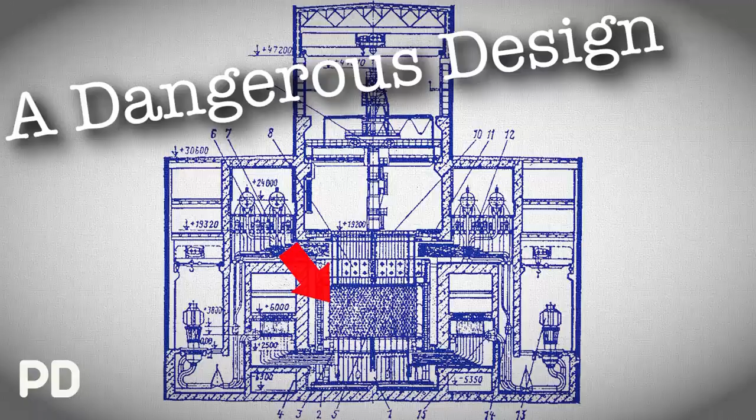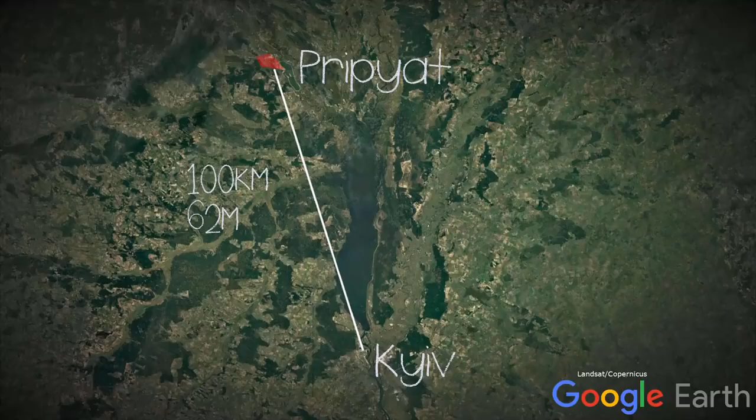Our story starts back in 1970 in Ukraine, about 100 kilometres, 62 miles, from Kyiv, when ground was broken for a new city that would become known as Pripyat, an atomgrad designed to house the workers for a new nuclear plant. The original plans were to build the city and the plant just 25 kilometres, 16 miles, from Kyiv, but it was thought to be too close to a major city, which turned out to be a good decision.

The concept of an atomgrad is similar to, say, Tomsk, which were closed cities, although Pripyat was open later on in its short lifetime as a city. These municipalities were designed to be self-contained communities with a sole purpose: keeping the power plant working and, by extension, keeping the workers employed there happy.

The community at Pripyat was developed to be the perfect home for a young family, with its amusement park and modern, at the time, architecture. In the same year, the ground where the new plant would exist was prepared for construction.

The Chernobyl Nuclear Power Plant began construction proper in 1972 after the central government decided on what type of reactors the site would house. Originally, the idea for a pressurised water reactor was thought to suit the new plant, but it was overruled.

It was overruled by Anatoly Alexandrov, the chief scientist who was at the time supervisor of the project of RBMK reactor plants. The reactor type was preferred due to the design being cheaper to produce, and as we found out with Leningrad, cost was a pretty high priority, some might say even over safety.

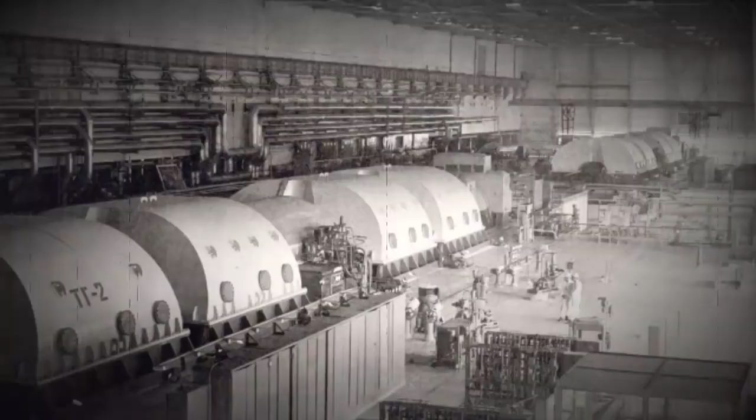The nuclear power plant had the first of its 4 reactors ready to operate in 1977, followed by number 2 in 1978. As a quick side note, Units 1 and 2 were the first generation RBMK-1000 reactors, and because of this they had slightly different core loadings and containment structures.

But the remaining 2 reactors at Chernobyl were of a slightly more modern second generation, named Units 3 and 4, which went online in 1981 and 1983 respectively. There were plans for another 2 units, but these were abandoned after 1988 when risks of contamination left the project untenable.

The nameplate capacity of Chernobyl Nuclear Power Plant was: Unit 1 at 1000 megawatts of electricity, Unit 2 at 1000 megawatts of electricity, Unit 3 also at 1000 megawatts, and the same with Unit 4.

In this video, I'll be focusing on the second generation RBMK, its design, and more specifically Unit 4. But I did look into the first generation in the Leningrad video.

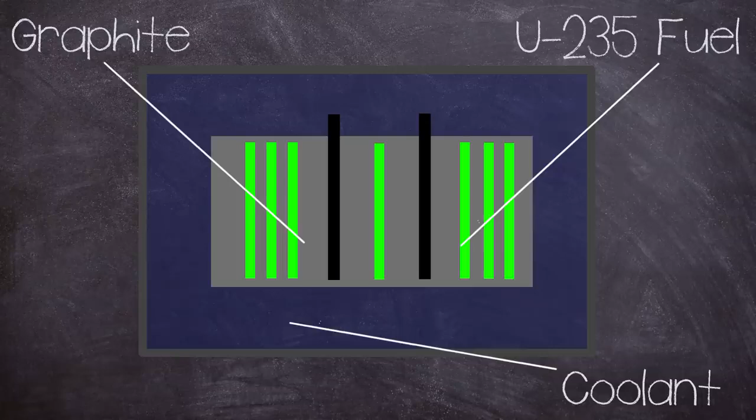The RBMK was a bit of a unique design in the reactor world, but it was a product of evolution rather than revolution, in that it used graphite to moderate the chain reaction with light water as a coolant. This combination allowed it to use lower enrichment uranium-235 for fuel, which is significantly cheaper than other reactor designs. The RBMK had a very large core region consisting of a height of 7 metres and a diameter of 11.8 metres, mounted in a steel cylinder placed on top of a biological shield.

The steel cylinder was 16mm thick and had a diameter of 14.52 metres by a height of 9.75 metres, dug into the floor of the reactor building, inside a reinforced concrete lined pit.

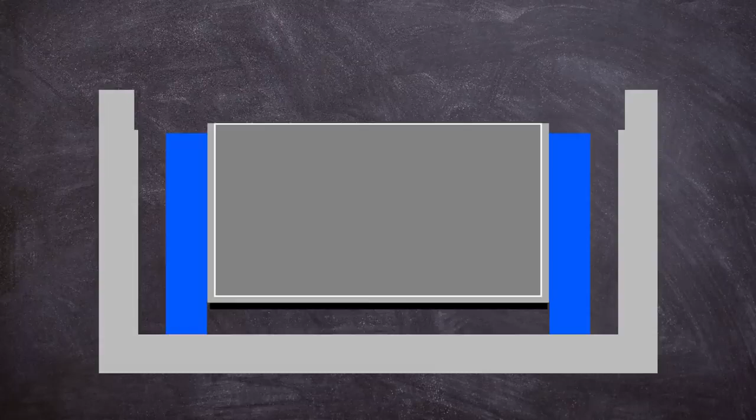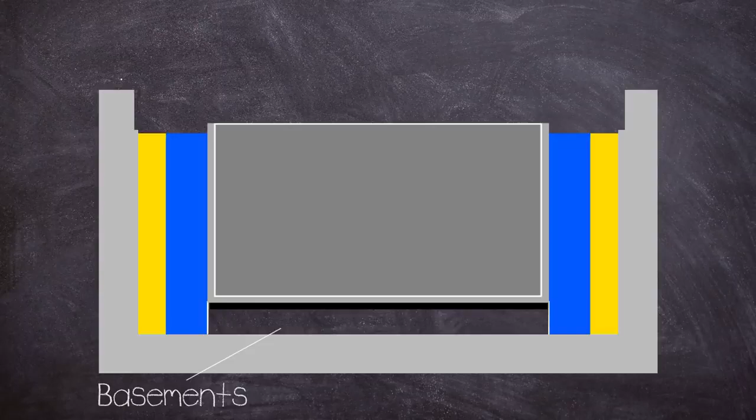Between the steel wall and the concrete lining, a water tank was placed, followed by a sand packing. Below the bottom biological shield, there were several basements used for pipework for the reactor core cooling loops. The core consisted of graphite blocks sized 25 by 25 centimeters, stacked up with holes drilled through the center for fuel and control channels.

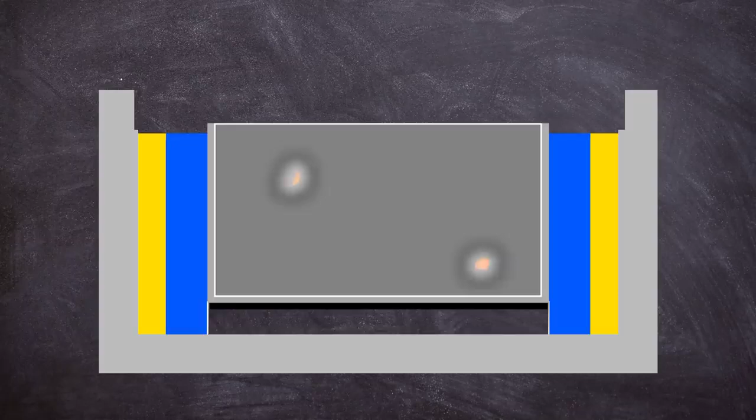The size of the core could cause issues in reactivity control during operation, but we will talk about that a bit later on. On top of the core, another biological shield was placed with a steel cover on top of it, which formed the floor of the reactor hall.

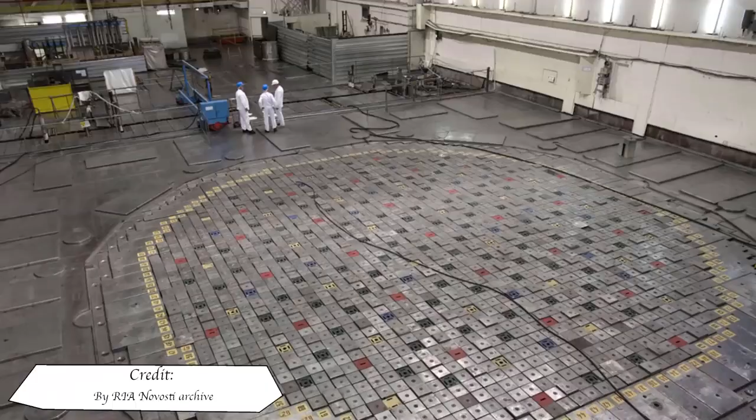The cover plate was capable of withstanding a pressure build-up resulting from steam released by two simultaneous channel ruptures. All of this allowed the design to be refueled whilst in operation, which again helped with costs by reducing downtime.

As a side effect of this, the confinement structure of RBMK reactors is less than ideal, as the tall refueling machine had to be housed inside the reactor hall. Because of the large floor space and subsequent roof requirements, the vast quantities of heavy concrete wouldn't have been architecturally, or more importantly, financially viable.

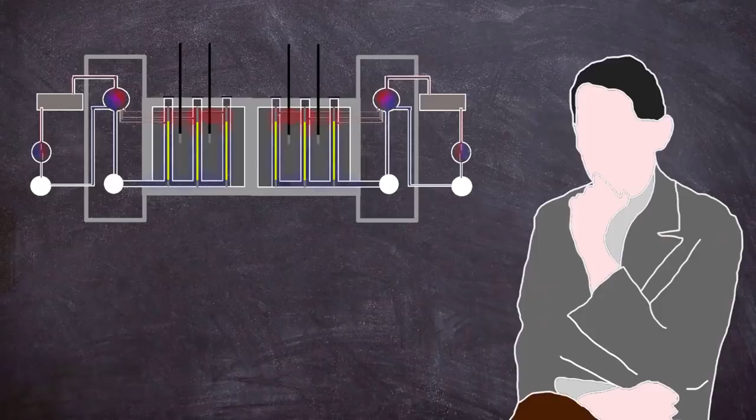The RBMK didn't have a prototype and was instead put straight into production, with the first reactor being installed in Leningrad in 1970. The original designs omitted confinement, instead claiming that the fuel being in its own channel with flowing cooling water was an acceptable alternative.

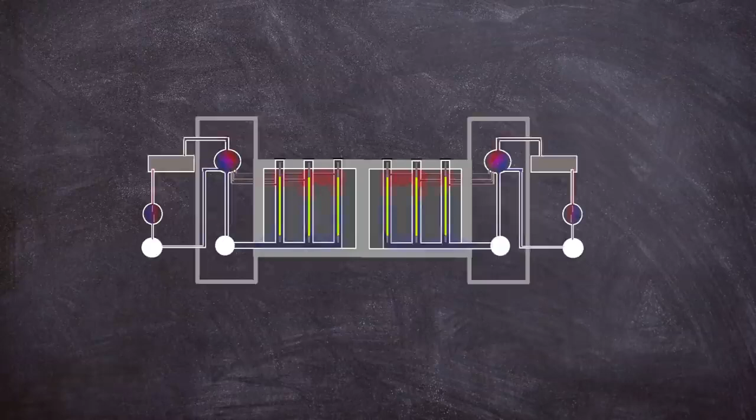The main takeaway from this is confinement was poor, resulting in disastrous results in the case of a fission product release. The coolant was pumped through the core, from the bottom common header through high pressure tube that jacketed the fuel elements, where the water would boil.

Coolant water also circulated in the control rod channels. The primary cooling of the reactor was via two separate cooling circuits, one of each for half of the core, meaning everything was doubled up, leading to four main circulating pumps, which were three operating and one standby per loop.

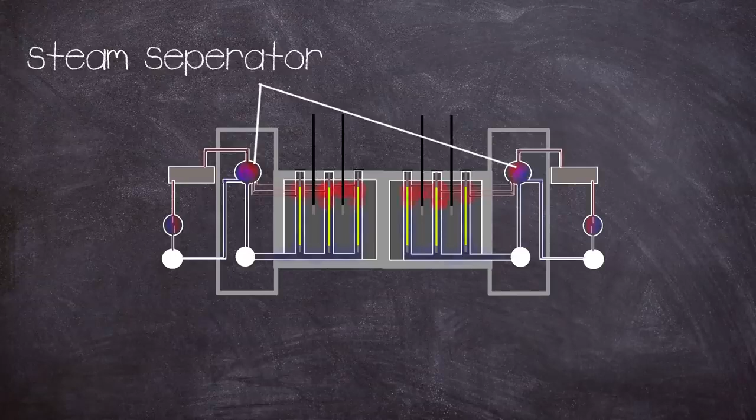As the coolant boils, it exits the top of the core and is passed through a water steam separator, which takes the steam to a high then low pressure turbines which generate the electricity. The steam is then passed through a condenser that turns it back into water to be pumped back into the core, completing the primary cooling circuit.

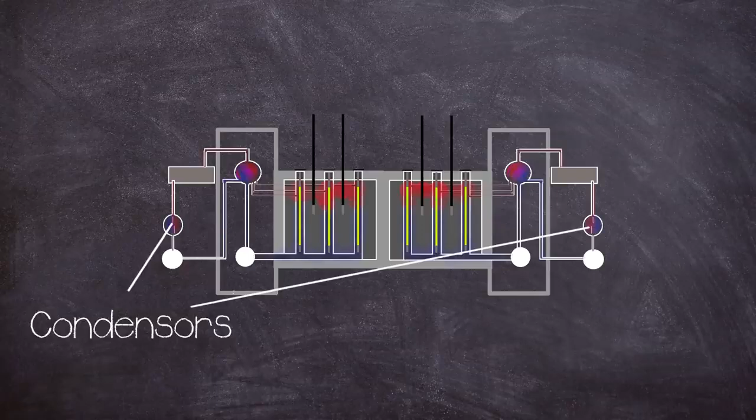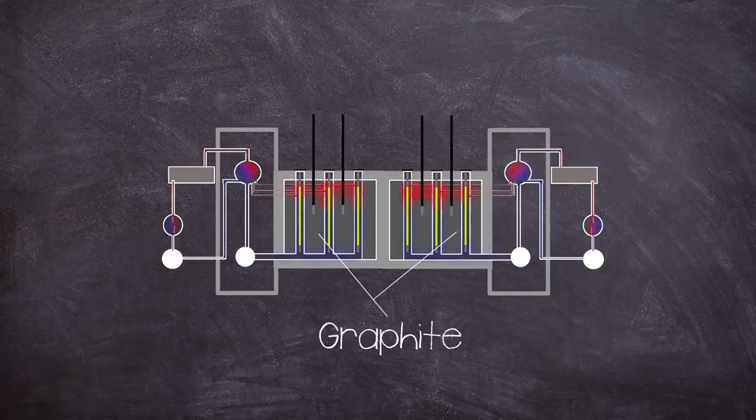The condenser is cooled by using a separate secondary water cooling circuit, meaning the primary cooling circuit is self-contained. As mentioned before, the reactor employed graphite blocks for its moderator.

Now, a moderator is used to reduce the speed of fast neutrons released from fission, so they can better facilitate a chain reaction, getting more use out of the fuel. Ideally, moderators work without capturing any neutrons, leaving them as thermal neutrons.

But where the design has its potential flaw is having a separate coolant that can also absorb neutrons, which can make the reactor unstable in certain situations. This brings up the big elephant in the room, and that is void coefficient.

You see, it wasn't just the graphite that had moderation characteristics, but the coolant water as well, because H2O naturally slows down and absorbs neutrons.

This brings a problem for the reactor, as with the increase in temperature from fission, the coolant boils off into steam, known as voids, i.e. a bubble that does not absorb neutrons. With the steam not absorbing neutrons, this leads to an increase in the power of the reactor.

The RBMK did not rely solely on its coolant for moderation, because that's what the graphite was for, but the water did absorb neutrons, meaning that as it boiled off, the operators had to compensate for this with the control system.

If not properly managed, an incident of a runaway can happen as the coolant heats up, increasing reactivity, heating up the coolant more, creating more steam, leading to greater reactivity, and this is called a feedback loop. During this reactor state, more and more neutrons are produced and their density grows exponentially fast, creating a positive void coefficient. The risks of a feedback loop were greater at certain power levels, but this will be covered later on.

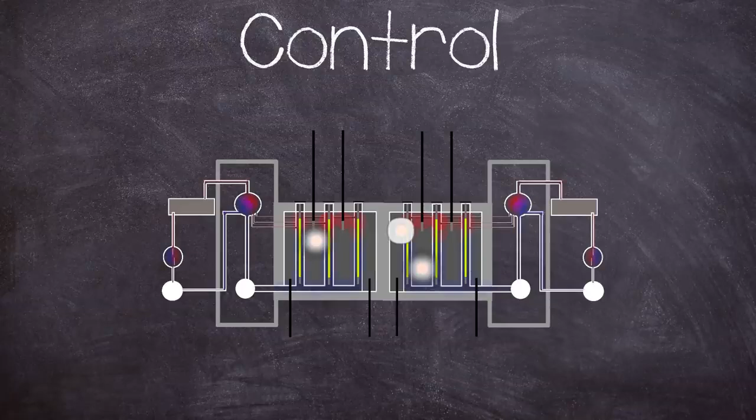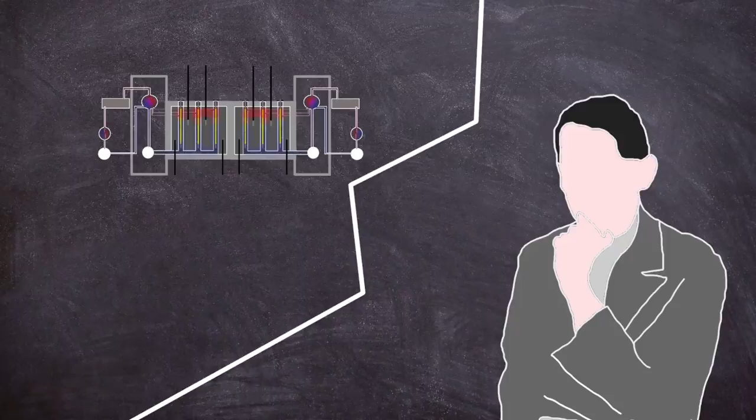And this leads on to the strange design choice for both top-loaded and bottom-loaded control rods. There were 167 top-loaded rods and 32 shortened rods loaded via the bottom, and another 12 automatic controls inserted from the top. The shortened rods were used to manage axial power distribution, which was necessary due to the core size to manage hotspots.

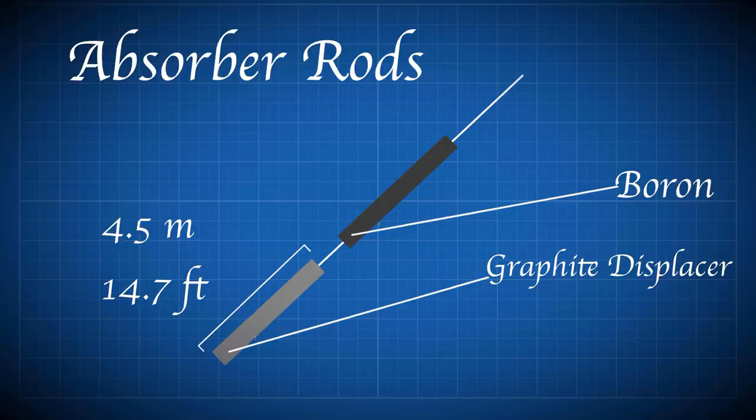The main control rods had a 4.5 metre long graphite rod termed a displacer attached to the end of the length of the control rods, except for the 12 rods that were used in automatic control.

The displacer connected to its rod via a telescope, with a water-filled space of 1.25 metres separating the displacer and absorbing rod. This was to stop water filling the space left behind by the control rod after it left the core region, which would parasitically absorb neutrons. Because removing one neutron absorber, a boron control rod, to be replaced by another neutron absorber, albeit weaker, in the form of H2O, kind of defeats the point of a control rod.

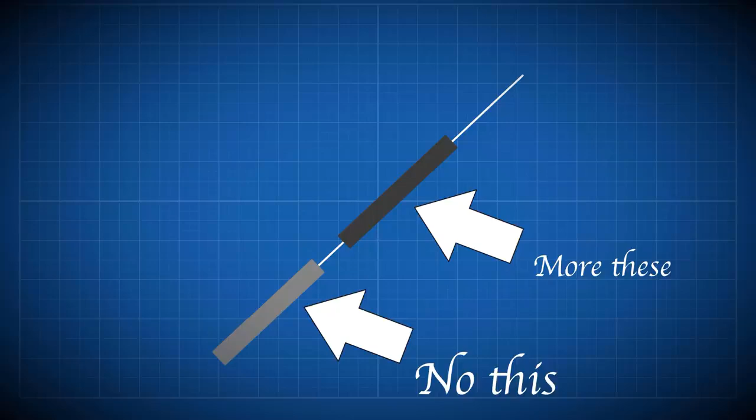Thus, if there was no displacer, then more control rods would be needed, as each one would have less of an effect on the reactivity of the core. The dimensions of the rod and displacer were such that, when the control rod was fully extracted, the displacer sat centrally within the fueled region of the core, with 1.25 metres of water at either end.

But this setup, in certain situations, could cause a positive scram effect. On receipt of a scram signal causing a fully withdrawn rod to fall, water was displaced from the lower part of the channel as the rod moved downwards. This caused a localised insertion of positive reactivity in the lower part of the core.

This was because the RBMK had a high moderator to fuel ratio, meaning the lower part of the core would experience a spike in reactivity as the graphite displacer entered it, replacing the neutron-absorbing water with neutron-moderating graphite. But this situation was only dangerous at certain power levels of the reactor, which was meant to be mitigated by the knowledge and training of the operators, and also importantly by their management.

Part of this mitigation was by having an operating reactivity margin. The ORM is the number of equivalent control rods of nominal worth remaining in the core. The total time required for a scram, or insertion of the emergency control rods into the core when starting from the upper limit stop switches, was around 18 seconds, which was relatively slow, but this was due to the size of the control rod channels and the fact that the coolant had to be pushed out of the way.

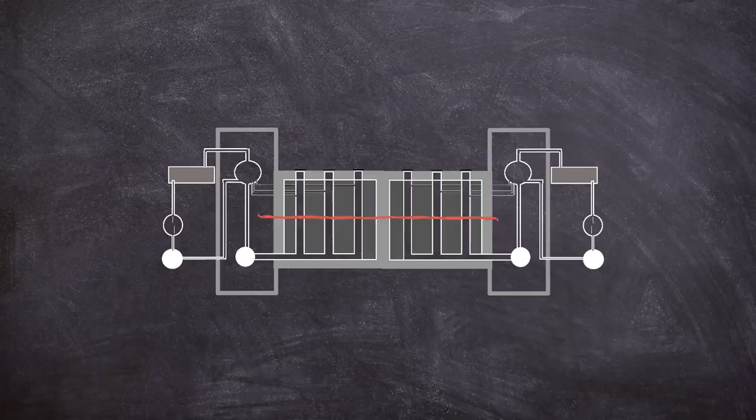The external detectors were all mounted mid-level of the core, meaning no low axial power monitoring could be undertaken. This meant that low power operation below 10% had to be done by the operators relying on experience and feel when monitoring the equipment. But manual low power control was only really intended for a cold startup, so to speak, when the reactor was free of the neutron absorbing poison Xenon-135.

I need to mention neutron poison, as it will play a vital part later on, and was also a contributory factor in another RBMK incident, the meltdown in Leningrad in 1975. During fission, some products are given off, one of which is Xenon-135, which has a high neutron absorption rate. This is okay when the reactor is in a steady state, as it burns off this undesired byproduct, since poison burning is proportional to reactor power.

But when the power of the reactor is decreased, the Xenon-135 is not burned off, and can shut down the chain reaction by absorbing too many neutrons. This is known as an iodine pit.

All is not lost, as Xenon-135 has a relatively short half-life of around 9.2 hours, so a reactor core is considered poison-free after several half-lives have passed. But this is not good from an economic standpoint, as the unit would be shut down for a few days, which is where good management is meant to come into effect, where safety is prioritised over money. But in the former USSR, taking a reactor out of action for a few days could have a detrimental effect on one's career longevity.

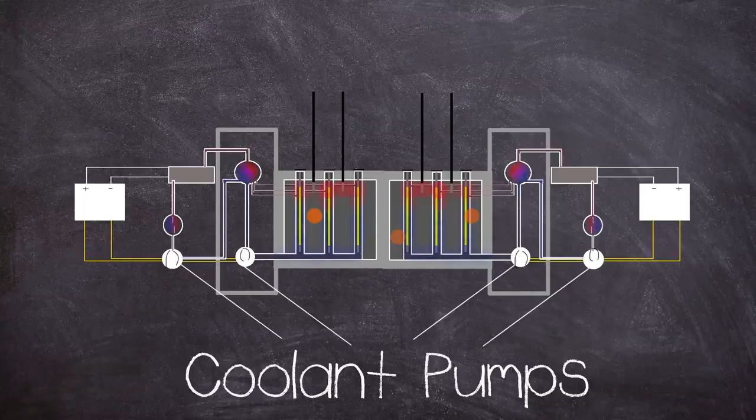And when the reaction stops, this continues, at least for a while after shutdown. During power operation, this is fine as electricity is being produced, but after shutdown, the pumps need to keep circulating to remove the decay heat.

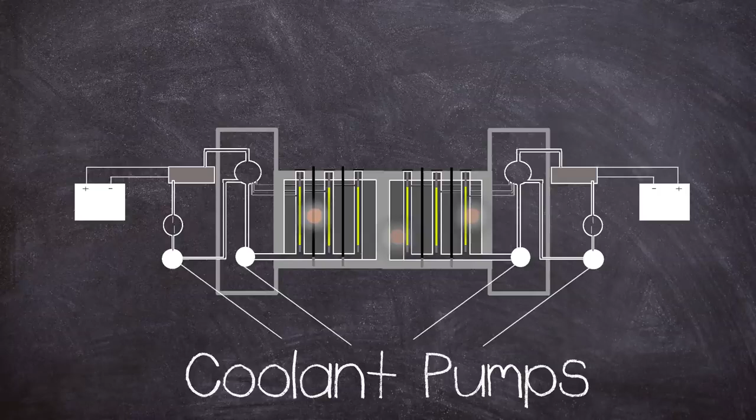Usually the electricity needed for the pumps can be drawn from the national grid. But what about if there is a full power outage? Then backup is needed. This presents a problem. If for any reason, being scheduled or not, a reactor is shut down and there is a power cut, how will the pumps keep working?

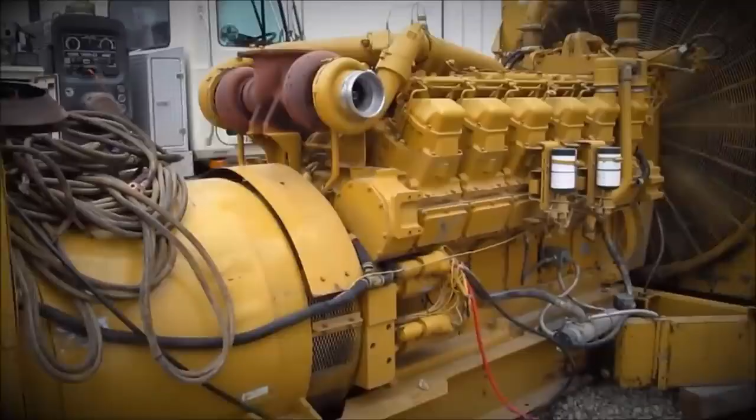Well, the solution is pretty simple, and that is a diesel backup generator. Each of Chernobyl's reactors had 3 backup diesel generators, which took in excess of 70 seconds to reach full power. Too much time in the event of a full power cut.

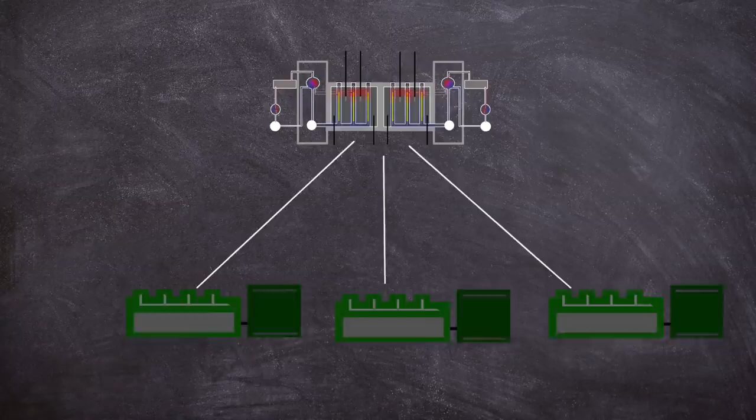In theory, some of this time could be covered by the spool down of the turbo generators, which was theorised to cover around 45 seconds. Not the full time needed, but possibly enough to prevent fuel melting.

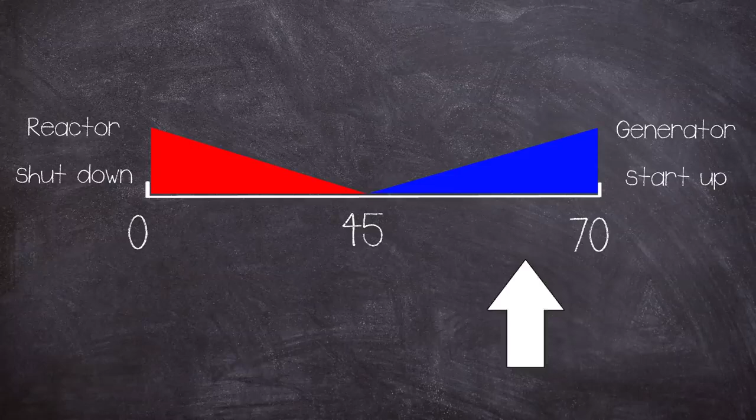To prove that this could work, it had to be tested out, and in 1982, 1984 and 1985 this was attempted, but all tests failed to produce the electricity needed to run the pumps. The test was to be conducted again in April 1986.

Strangely, the test procedure that was written hadn't taken into account the eccentricities of the RBMK reactor, especially at low power outputs. The test was to be conducted during a routine shutdown. For the test to go ahead, some vital systems had to be switched off, most notably the active-passive emergency cooling system used in a loss of cooling accident. This required the chief engineer to sign it off.

In preparation for the test, the following had to be set up. The reactor power was to be reduced to between 700 and 1000 megawatts of thermal energy, and the steam turbine generator was to be at normal operating speed.

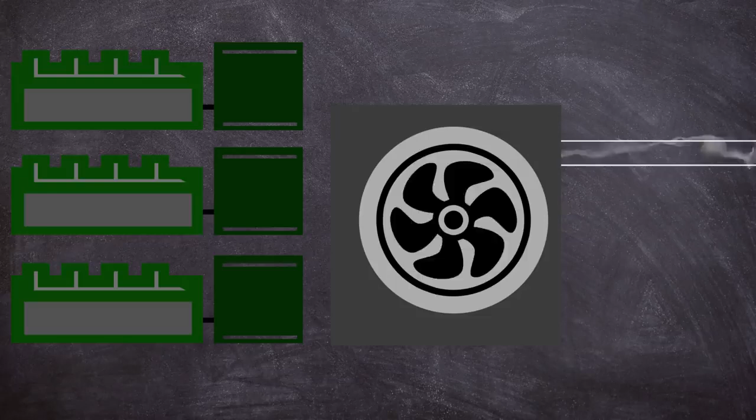After all this was sorted, the preparations for the electrical test could go ahead. The steam supply to the turbine generator would be closed off. The turbine generator performance would then be monitored to see if it could bridge the power for coolant pumps until the emergency diesel generators took over.

When the emergency generators supply electrical power, the turbine generator will be allowed to continue freewheeling down. The normal planned shutdown procedure of the reactor was then to be completed.

The date of the test was to be the 25th of April 1986, 15 minutes past 2 p.m, completed by the day shift. As such, the operators were briefed on the procedure and a team of electrical engineers was present.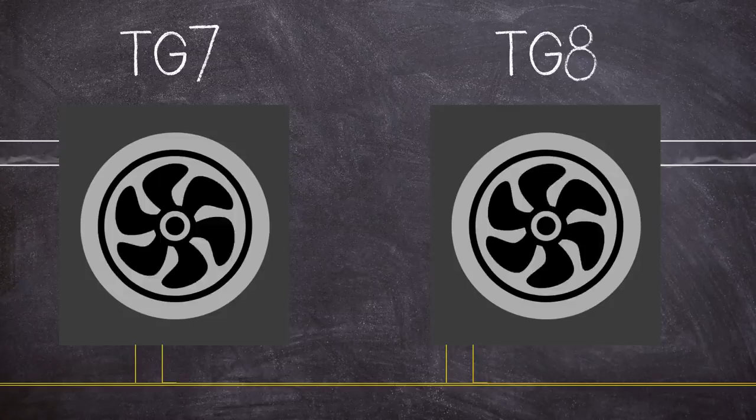At around 1 a.m. on the 25th of April, the reactor was gradually powered down to around 50%, in time for the day shift. At 1:05 p.m, the turbo generator TG7 was switched off. The 4 main circulating pumps, 2 electrical feed water pumps and other electrical equipment that was connected with this turbo generator were switched over to bus bars for the turbo generator TG8.

The ECCS was disabled with the correct authorization from the chief engineer, but just after 2 p.m, the Kiev electrical controller asked for the test to be postponed to cover the evening electrical peak demand. The request was due to another power station in the region unexpectedly going offline. Chernobyl's director agreed and the test was pushed back, but the ECCS was not reinstated.

The status of the ECCS showed the lack of safety culture at the plant. Although the system wouldn't really be a factor in a disaster, it highlights the management culture at the time.

The day shift soon gave way to the evening shift, which in turn was soon to be replaced by the night shift. To oversee the test, Anatoly Dyatlov, Deputy Chief Engineer, took the helm in the control room. Due to his seniority, he outranked all operational staff on shift at the time.

Alexander Akimov was the chief of the night shift, and Leonid Toptunov was the operator responsible for the reactor's operational regimen and the movement of the control rods.

At around 2300 hours, the Kiev electrical controller allowed the continuation of the reactor shutdown, and by 10 past 2300 hours, the reactor power was brought down to 700 megawatts of thermal energy. The night shift operators had to prepare for the test in a short period of time.

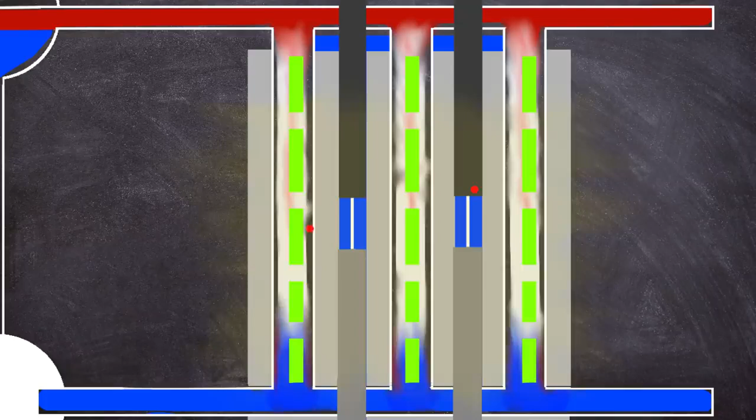In theory, after the test was completed, the team would have a straightforward night, just monitoring the decay heat until the next crew changeover. As the power dropped off, the high amounts of iodine-135 decayed into the poison xenon-135, as it was not being burned off quick enough.

This reduced the power of the reactor without any operator intervention to 500 megawatts of thermal energy, at which point manual intervention was started in order to maintain the level.

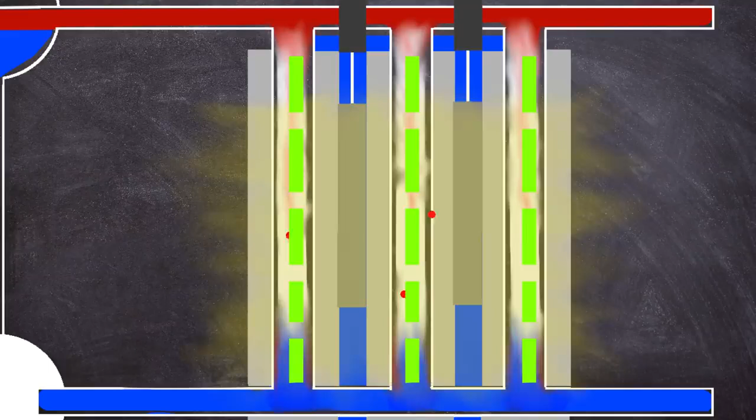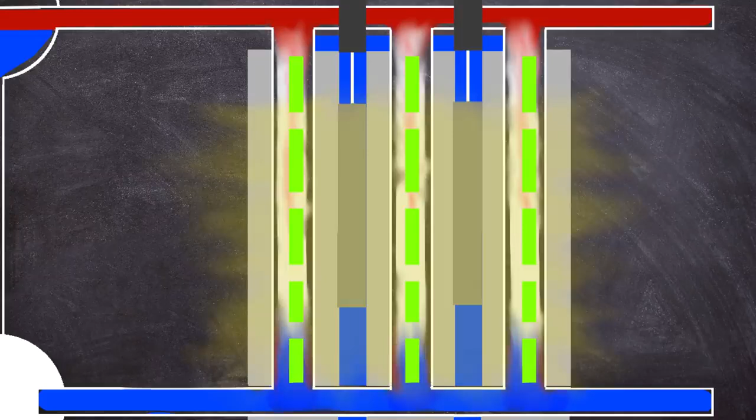At 28 minutes past 12 on the 26th of April, the reactor power had dropped to just 30 megawatts of thermal energy, with a near shutdown-like state. It is not 100% known why, but both equipment failure and operator error have been attributed to the reactor state.

As set out in the operating instructions, the reactor should have been powered down to wait for the xenon-135 to decay, but shutting down the reactor without doing the test wouldn't have made many friends in management. To increase the power, the control rods began to be removed to try and overcome the poisoning of the core, reduced coolant void, and graphite cooldown.

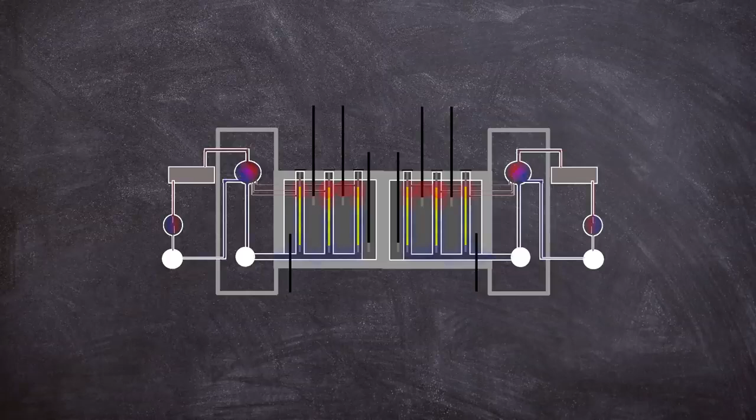In the attempts to raise the power, the operational reactivity margin was violated by removing more of the absorbing control rods, and by 1 AM around 200 megawatts of thermal energy was reached. The reactor was now in a dangerous state.

Not wanting to leave empty-handed, Dyatlov insisted that the test be conducted at the current power level. In reality, the core was heavily poisoned and was in a dangerous state with very few absorbing rods for emergency control. During the preparations of the test, the operators powered up the 2 backup coolant pumps, leading to all 8 working.

The increase in water flow reduced the voids within the core, which would have set off an automatic scram, but this was bypassed by the operators. As the coolant absorbed the neutrons in the core, only 8 control rods were left as a safety margin. The minimum that the ORM stipulated was that around 28 rods should have been in the core.

The reactor started to experience a feedback loop. With not many rods in the core to manage the power, the situation was that the water in the reactor found itself being the main neutron absorber, and disaster was just waiting to happen. At 1:23 in the morning, the actual test had now begun.

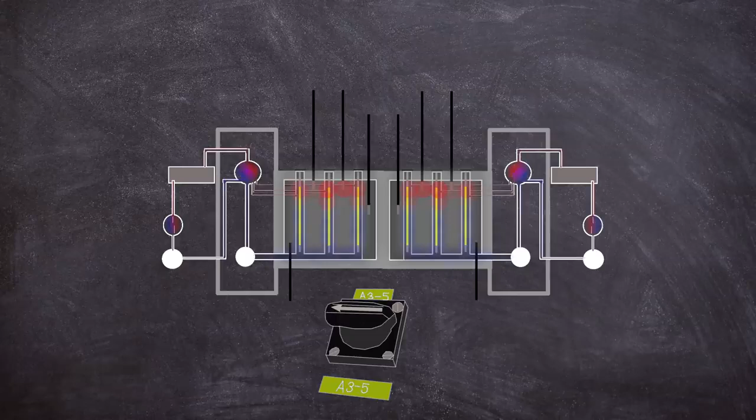The command was given, the stop valves for turbine number 8 closed and the rundown operation started. As the turbines spooled down, the power to the feed water pumps slowed, increasing the temperature of the coolant, creating more voids. With less water absorbing neutrons, the power of the reactor began to rise.

A feedback loop was beginning to start in the lower part of the reactor core. The operators pressed the AZ5 button in response to the worrying increase in power, and the control rods started their travel into the reactor core.

As the control rod attached graphite displacers moved down to the lower part of the core in their control channels, the neutron absorbing water was pushed out of the way, creating a momentary spike in power, replacing it with neutron moderating graphite. During the spike, some of the fuel rods ruptured, blocking the control rod columns, stopping the control rods

at 1/3 insertion. This left the graphite water displacers stuck in the lower part of the core, increasing the runaway power excursion. Within 3 seconds, the reactor power rose to 530 megawatts of thermal energy. In the control room, a few shocks were felt, and the control rod indicators showed that the insertion had stopped.

As the channel pipes began to rupture, mass steam generation occurred as a result of depressurization of the reactor cooling circuit. Fission materials leaked into the coolant, and steam pressure grew inside the core as the coolant boiled off, creating a greater neutron population. The reactor power hit 30,000 megawatts of thermal energy, although it is thought that the power could have gone much higher than that during the excursion.

The steam blew off the top steel cover and top biological shield of the reactor as more than the 2 designed fuel channels failed, releasing debris into the reactor building. This was what would later be described as the first explosion, but it would not be the last.

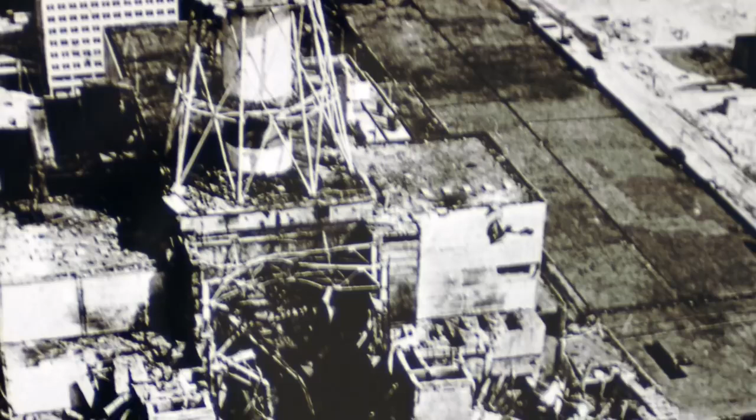Some of the debris that was ejected started a fire on the roof of Reactor 3's building, but insanely the unit wasn't shut down straight away. Instead, the operators were told to take iodine tablets and don respirators.

At 1:45 in the morning, the first responders from the Chernobyl fire team arrived under the command of Lieutenant Vladimir Pravik and began trying to extinguish the flames on Unit 3's roof. All around them lay pieces of Unit 4's graphite core.

The firefighters were only aware of the fire, and because of this they didn't have any radiological protective clothing on. As they worked, they breathed in some of the fission material in the form of dust and were exposed to the deadly radiation.

Many would come down with acute radiation sickness shortly after. Some of the first responders felt a metallic taste in their mouths, similar to what others had reported post-exposure, for example from the victim of the Wood River Junction criticality.

The fires on the roofs of Units 3 and 4 were under control between 2:10 and 2:20 in the morning, and the fire was fully put out at 5 o'clock in the morning. However, the graphite fire in what was once Unit 4 continued to burn, expelling its radioactive plume of dust, steam and smoke into the atmosphere.

The operators started to pump water into the core, but this did little to bring the situation under control. The estimated dose of 5 to 6 Röntgens per second was experienced around some parts of the reactor building, which is equivalent to more than 20,000 Röntgens per hour, enough to give a lethal dose in minutes.

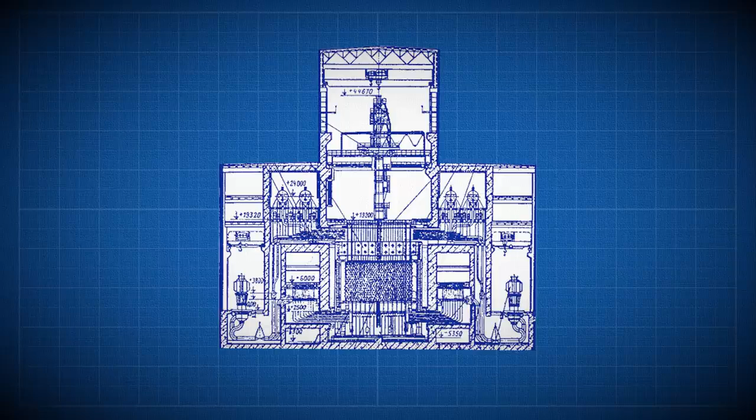The firefighting efforts and pumping of coolant water left the basement flooded, which caused another potential disastrous outcome: another steam explosion. The fuel from the core was melting towards the basement, which had flooded. But below that was more water from the bubbler pools, a large water reservoir for the emergency cooling pumps and pressure suppression system.

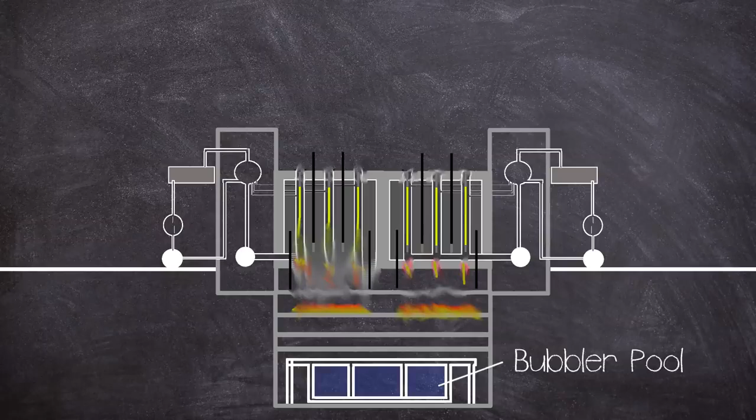This was the next point of focus for the accident management team. Engineers Alexei Ananenko and Valery Bezpalov, and supervisor Boris Baranov, volunteered to empty the bubbler pools. This was done by valves controlling sluice gates, housed in a room that had now become flooded. All three men donned protective suits and breathing equipment and made their way down the corridor.

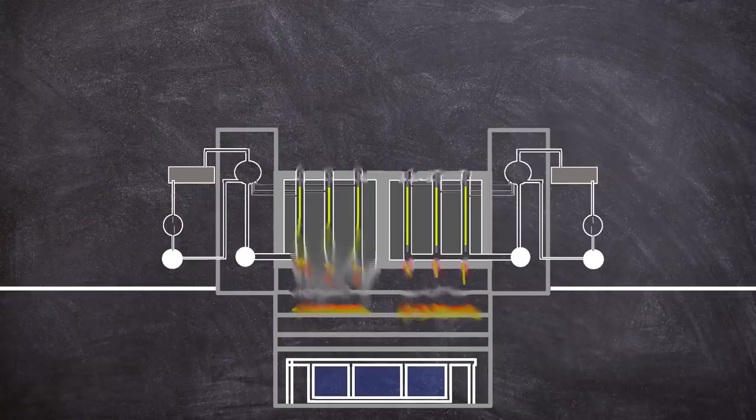The men were successful and the bubbler pools began to empty. Surprisingly, all three survived, not only the day but continued to live long after the disaster, averting the immediate steam explosion. But that wasn't the end to the worry of a deadly explosion.

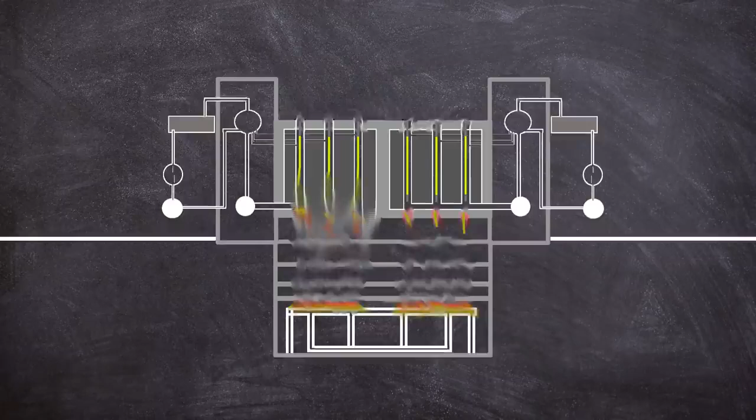As described in the film China Syndrome, the core could continue to melt through the floor of the containment and into the earth, eventually hitting the water table, meaning another steam explosion. The next focus of the accident management team was stopping the molten core from escaping the bottom of the reactor basement.

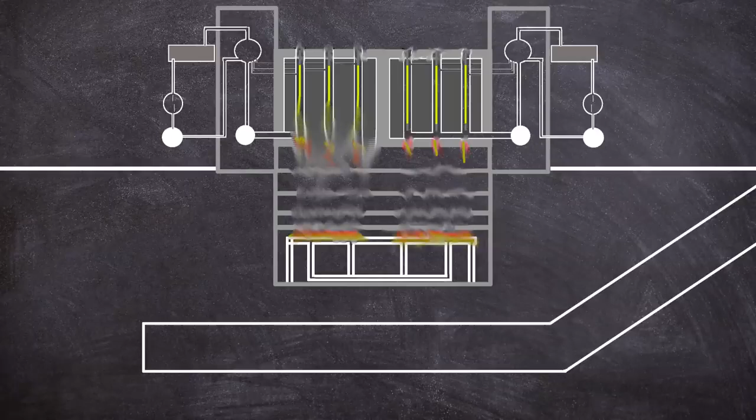A design thought up by physicist Leonid Bolshov involved digging out a cavity below the reactor building basement. The concept used a coiled formation of pipes cooled with water and covered on top with a thermally conductive graphite layer. The graphite cooling plate was to be encapsulated between two sacrificial concrete layers, each one metre thick. In theory, as the molten uranium oxide hit the graphite, it was to rapidly cool down, catching the core meltdown.

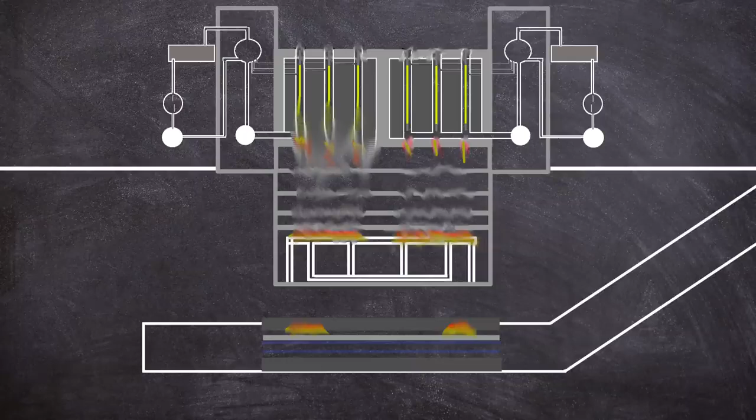Thankfully, the theory didn't have to be put into practice, as the core had finally come to rest in one of the lower basements of the reactor building, part of which formed the famous Elephant's Foot, discovered in December 1986, with a radioactivity of 8,000 roentgens, or 80 grays per hour. For reference, a whole body dose of around 5 grays can be lethal.

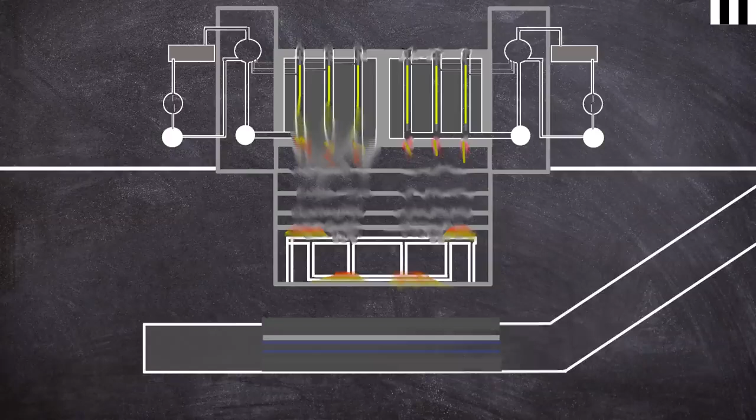The molten material is known as corium, a mixture of material found inside the core, mainly made up of silicon dioxide with traces of uranium, graphite, zirconium and titanium. The excavated cavity and cooling system, now unneeded, was filled with concrete to help the structural integrity of the heavily damaged reactor building.

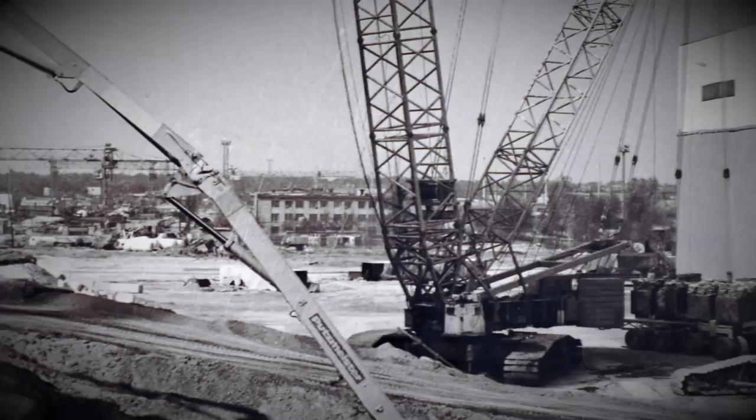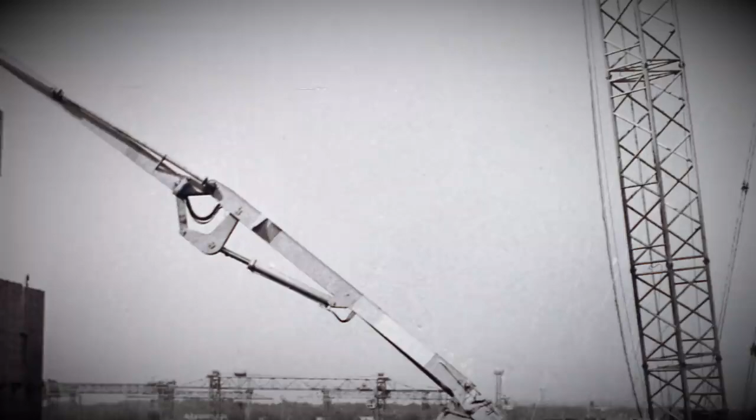Before the core could be enclosed under the sarcophagus, the next phase of remediation was to remove all the core material scattered across the area, and one of the most dangerous places was the roofs of the buildings surrounding Unit 4. Initially, robots were thought to be able to undertake the clearing works, but due to radiation interference, only around 10% of the debris could be recovered.

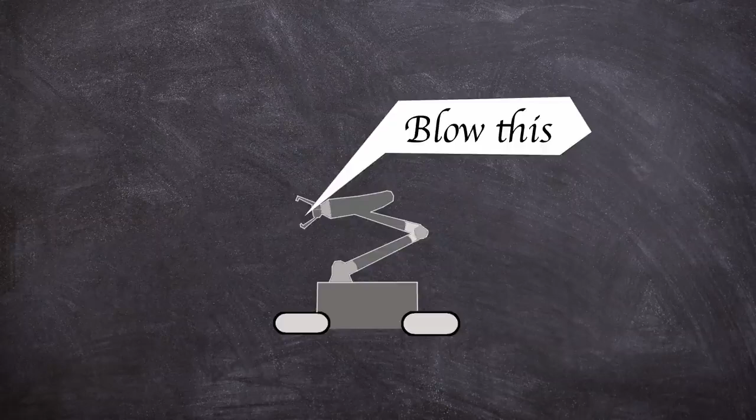This necessitated the use of good old-fashioned people. The most basic of equipment was needed for the task, including protective clothing and a shovel. A total of 5,000 people, known as liquidators, were called upon to undertake the cleanup on the roof, each only being allowed between 45 to 90 seconds of total working time to reduce the risk of exposure. The calculated risk was 25 rem, or 250 millisieverts, of radiation per person.

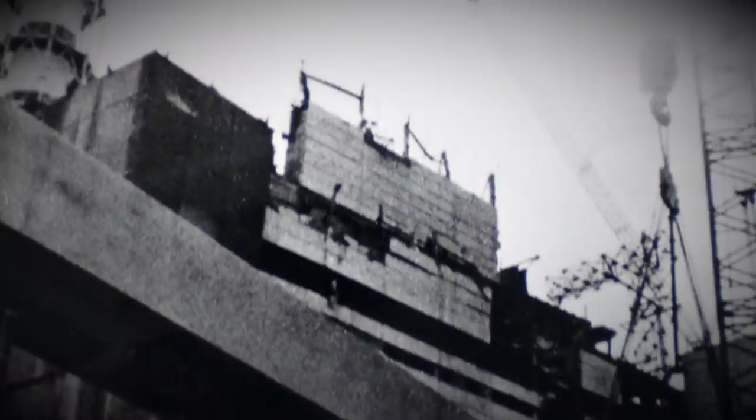There were many more liquidators also used for other clearing up works in the wider area. And finally, after this, the sarcophagus could be closed over the turbine hall and reactor building. The construction was undertaken over 8 stages, all whilst Unit 4 released contamination, and next to Unit 3, which still needed to be operable. Concrete containment walls were built around Unit 4 and a dividing wall was erected between it and Unit 3. The sarcophagus was placed on top of the concrete containment walls.

More than 400,000 cubic metres of concrete and 7,300 tonnes of metal were used during the construction of the sarcophagus. The building encapsulated an estimated 740,000 cubic metres of heavily contaminated debris together with contaminated soil. Holes were installed in the structure to allow pressure release, albeit through a filtration system. The shelf life of the structure was only thought to be around 20 to 30 years, necessitating a new containment structure, but this will probably be covered in the next video in this series.

So, with an official death toll of 31, a nuclear power plant essentially unusable, and many decades ahead of remediation works, how was Unit 4 allowed to be operated in such a dangerous state? Unsurprisingly, it comes down to management.

The warning signs of the potential for fuel damage in an RBMK-1000 reactor reared their heads several times through the reactor type's history. A partial fuel melting in Leningrad over 10 years before in 1975 had been covered up, and information was not passed on to other RBMK operational staff at different power plants.

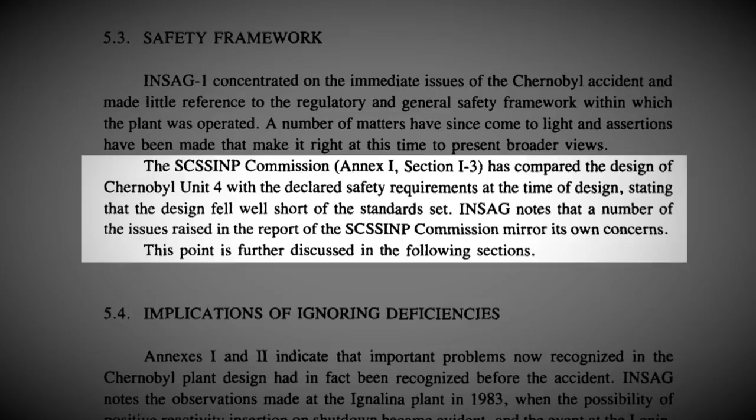This was all highlighted in the 1992 INSAG 7 report, which also said in its summary, the plant fell well short of the safety standards in effect when it was designed, and even incorporated unsafe features, compounded by inadequate and ineffective exchange of information between both operators and between operators and designers.

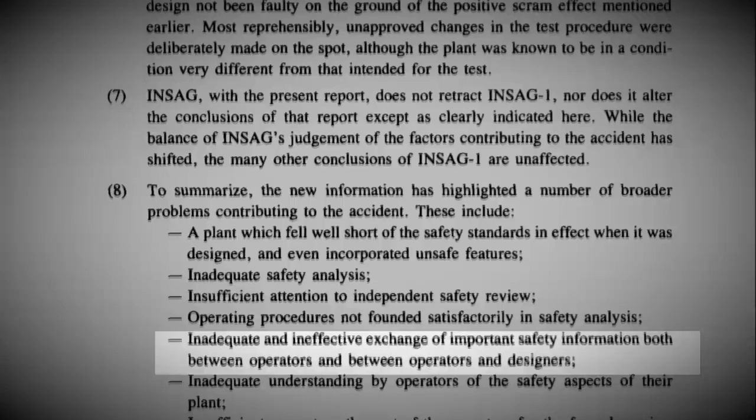There was an inadequate understanding by operators of the safety aspects of their plant, also affected by insufficient respect on the part of the operators for the formal requirements of operational and test procedures. The industry in the USSR had an insufficiently effective regulatory regime in place to counter pressures for production.

The pressures from central government and lack of awareness of the design risks of the reactor meant that management acted dangerously in the false pretense that the RBMK was indestructible. Pretty much the entire management structure was throwing around a grenade that they didn't know had the pin pulled out of, meaning disaster was only a matter of time.

Now I'll be following up this video with another video at some point about the wider impact of the disaster on local and wider population, as well as digging deeper into the liquidators and their heroic work. Thanks for watching, I hope you enjoyed the video.